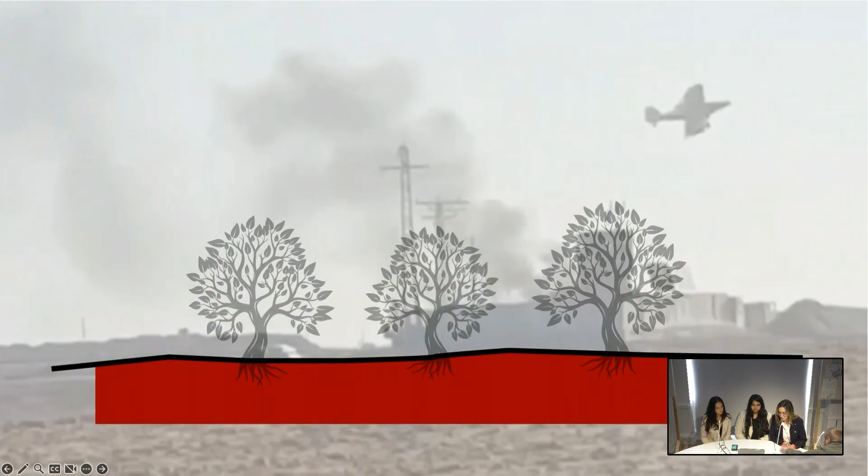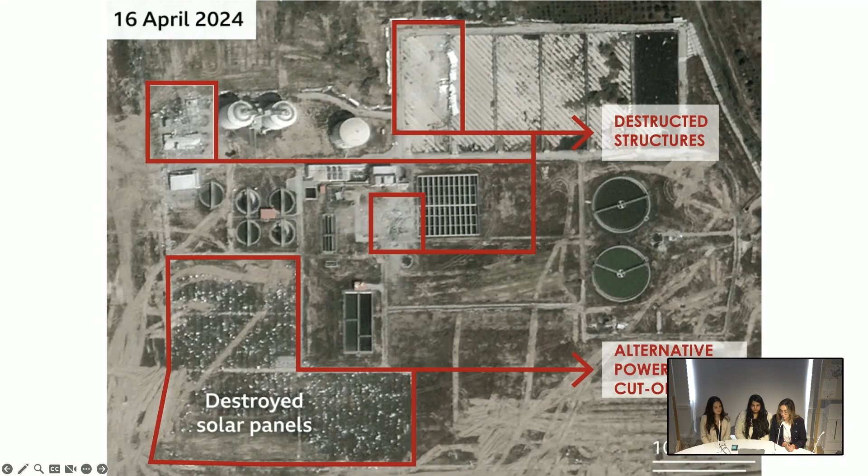Military operations continue to contaminate the ground as Human Rights Watch reports that white phosphorus has long-lasting effects, penetrating soil, destroying ecosystems and vegetation for years. Destruction of essential infrastructure has intensified the situation further. According to the UN Environment Programme, 60% of wastewater treatment facilities have been destroyed, and due to limited resources, materials, and restricted movements, around 70,000 tons of waste have piled up in makeshifts.

With an alarming rate, land devastation and wastewater systems collapse. We have an ecological emergency expected to persist for generations. How do we then imagine the future of Gaza?

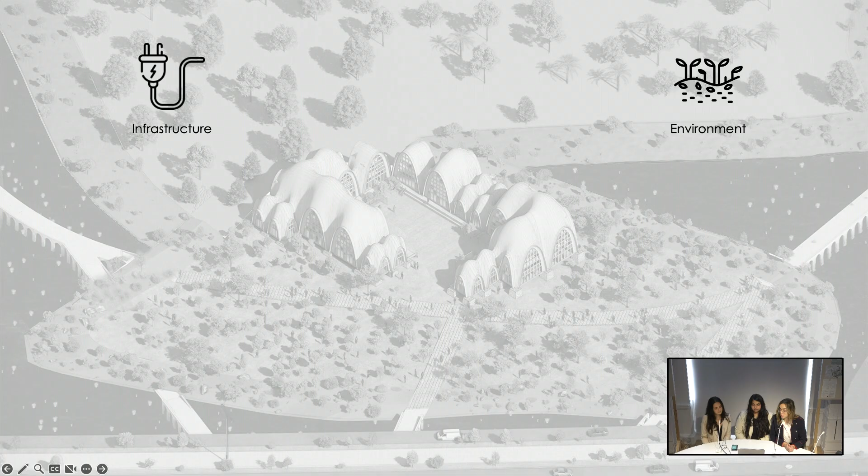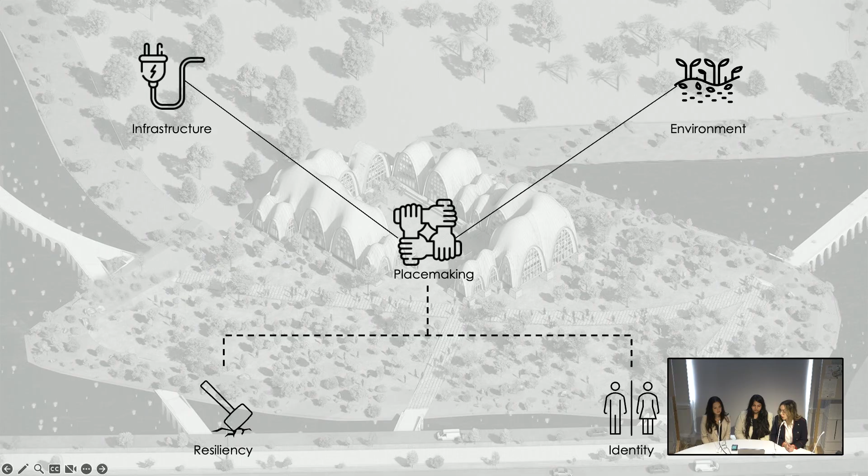Emerging from Gaza's ravaged landscape, this vision for reconstruction transcends physical rebuilding. It introduces a new building typology that heals the land and fosters placemaking, allowing people to reclaim their lives, culture, and hope. Architecture serves as a tool for resilience and identity, challenging colonial narratives while restoring ecological and social bonds. Through community strength, we reimagine Gaza as a place of renewal, where architecture leads to restoration of water, soil, and sky. Today, we explore the deep connection between architecture and ecology in shaping sustainable urban futures.

Architecture actively engages with challenges like climate change and resource depletion, emphasizing its responsibilities beyond technical solutions. We view the land as a vital element of architecture, underscoring the need to integrate building culture along with ground culture by dismantling barriers between built and natural environments. We make soil and water health cornerstones of our approach. In this way, architecture becomes a regenerative force, nurturing ecological resilience and fostering coexistence between human and natural systems.

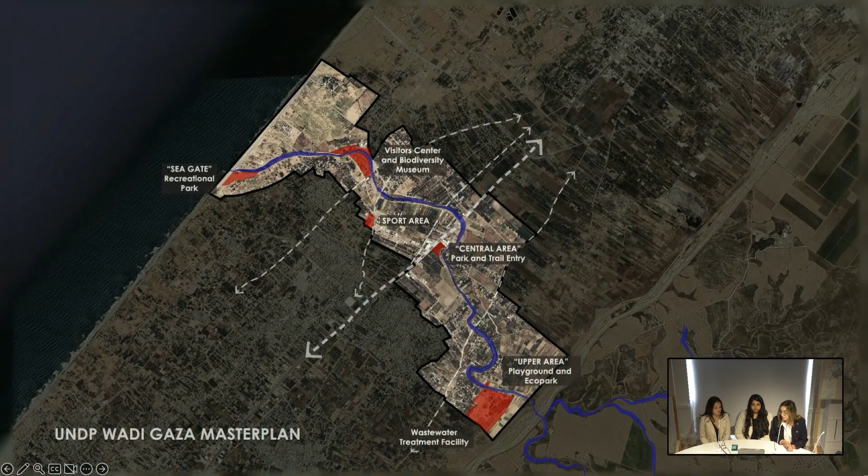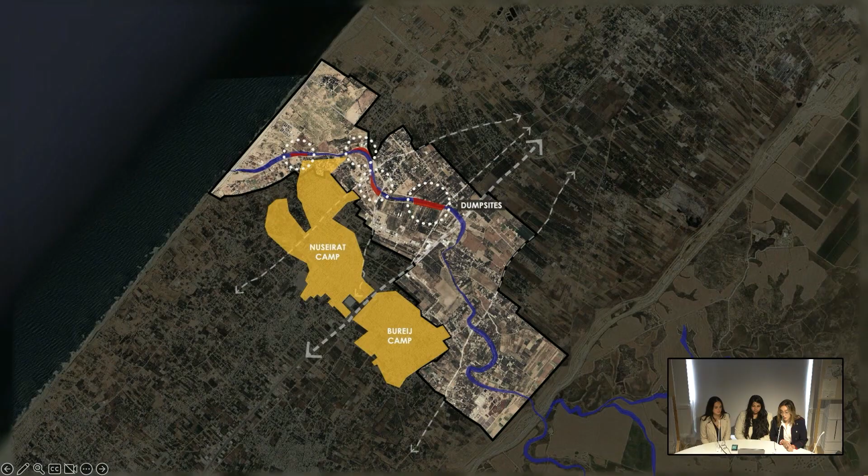Wadi Gaza is an essential seasonal river that recharges Gaza's coastal aquifer. However, it faces significant challenges that have degraded both water quality and soil health. In 2019, the UNDP proposed a master plan for its rehabilitation. Based on that, our proposal presents an alternative approach that links Gaza's infrastructure reconstruction with environmental rehabilitation, emphasizing ecosystem regeneration.

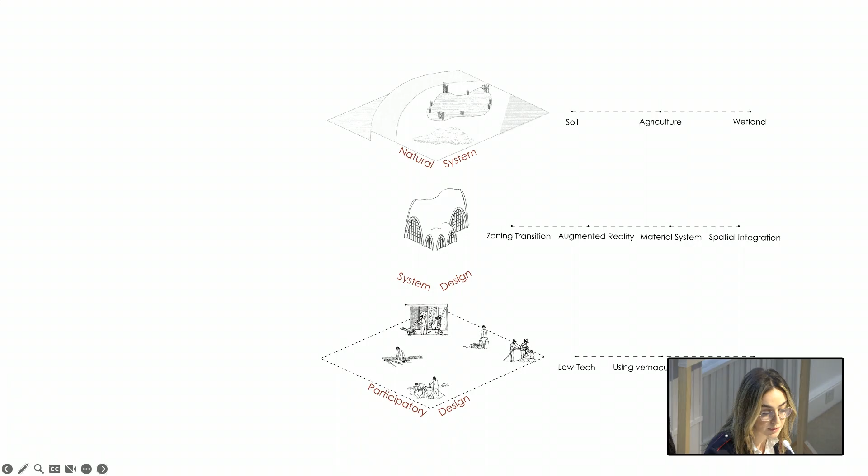Key questions we explore: how a low-tech material system reinforces intersections of public placemaking and remediation processes for wastewater and soil treatment, using local compressed soil block fabrication and enhancing awareness to foster a shared sense of ownership in the public infrastructural facility. We focus on 3 intervention levels: natural systems, system design, and participatory design, to propose a whole ecological system. The individual elements of the systems lie with each other in a feedback loop, affecting one another.

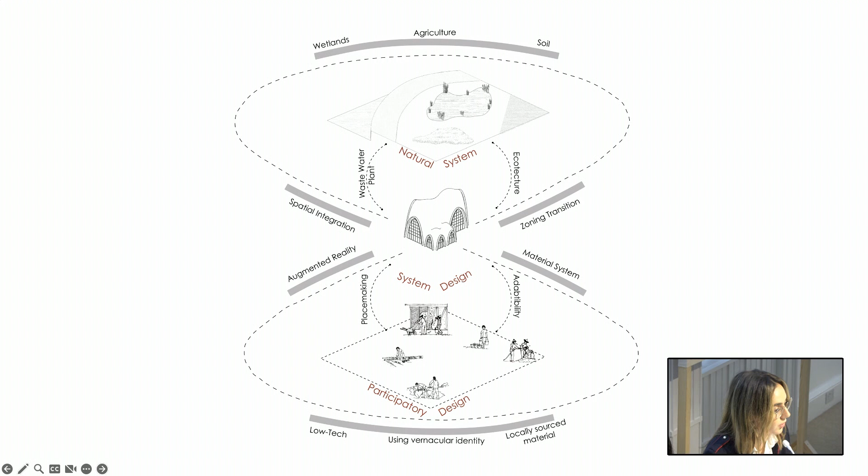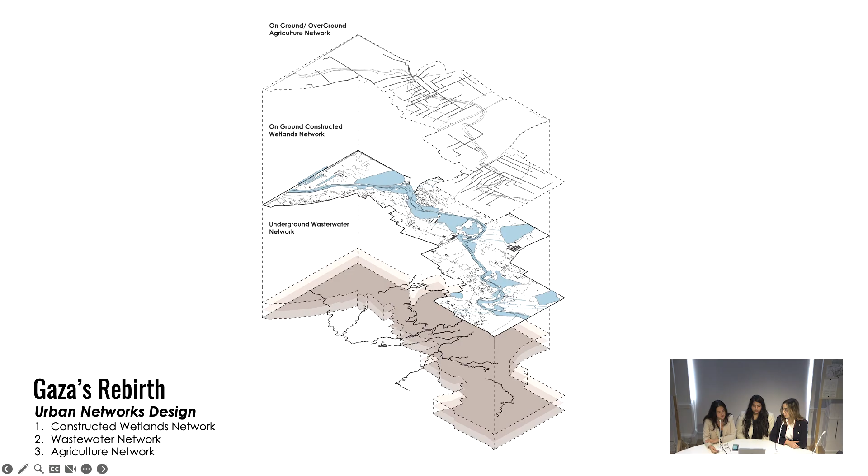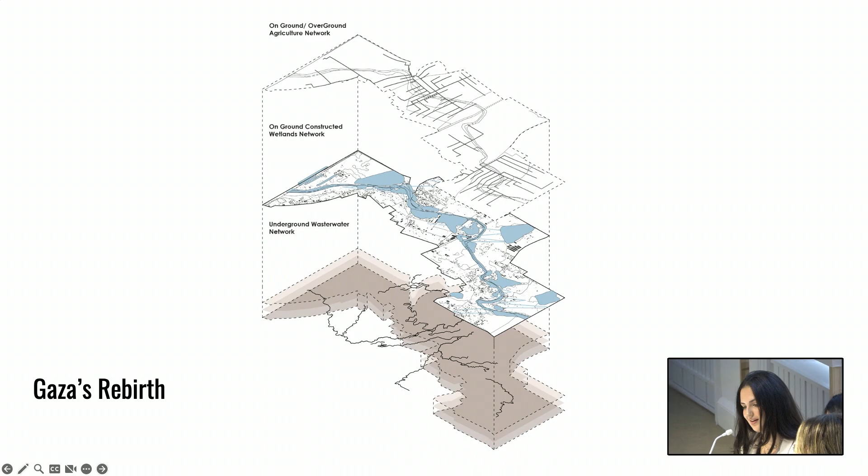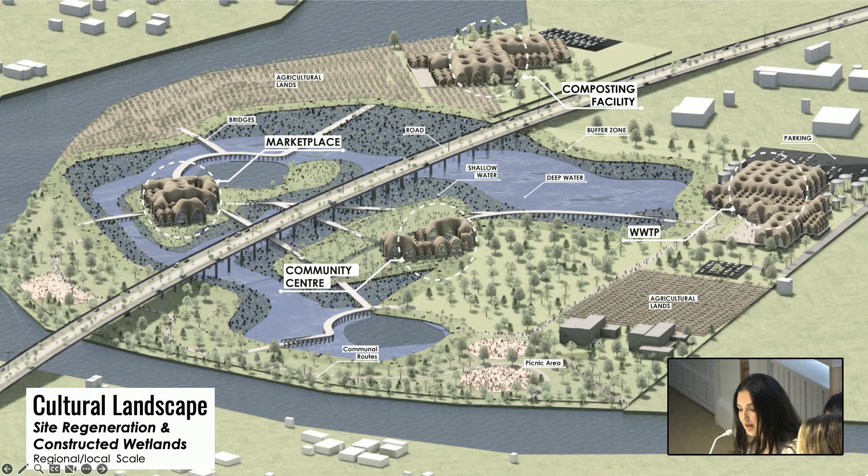The scope of the thesis encompasses the design of interconnected urban networks, emphasizing wastewater management, agriculture, and constructed wetlands, integrating systems that operate underground, at ground level, and above ground. At a regional scale, the thesis emphasizes site regeneration by integrating designed urban networks within a regenerative system that connects cultural landscapes and constructed wetlands.

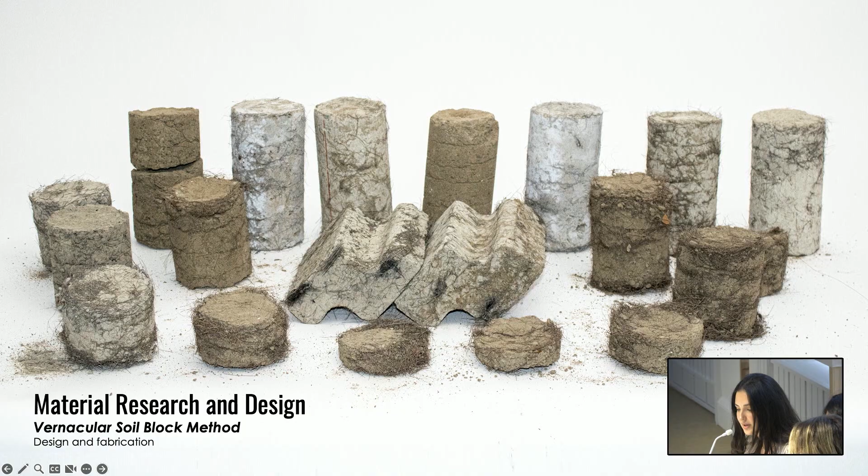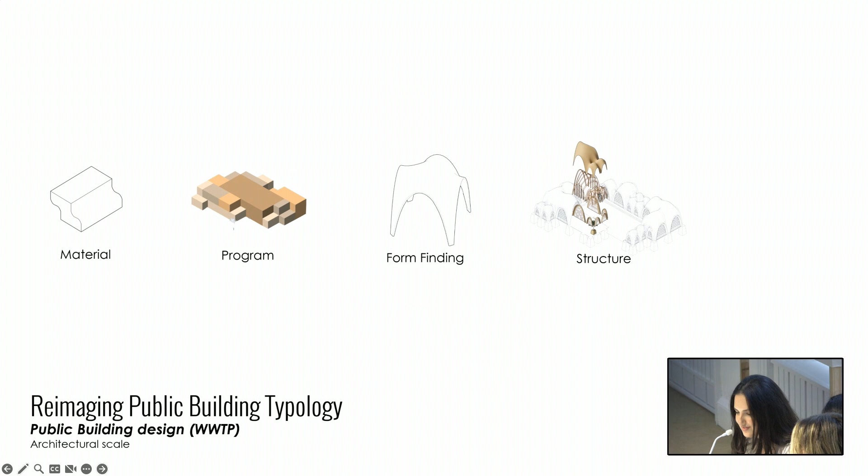Material research and design focused on utilizing local materials and employing compression techniques for the production of building bricks and fabrication techniques. Rethinking public building typologies to incorporate wastewater treatment plants, composting facilities, and communal spaces while addressing the cultural needs of the community. This approach fosters placemaking through educational, communal, and economic programs.

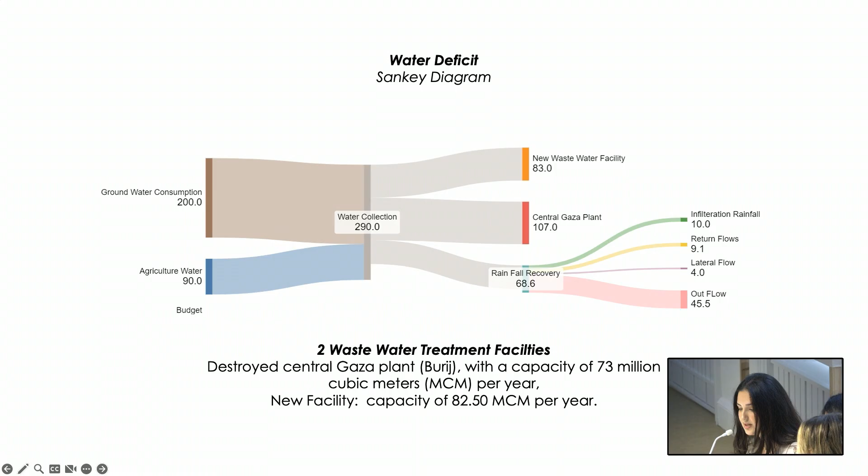Focusing on a natural system that integrates agriculture, water, and soil. The design of wastewater networks aligns with needs in wastewater production, irrigation, rainfall recovery, and groundwater usage. This assessment led to plans for 2 treatment plants, one as a replacement for the destroyed facility and another as a new addition. Wetland construction volume was calculated based on catchment area, runoff, and rainwater.

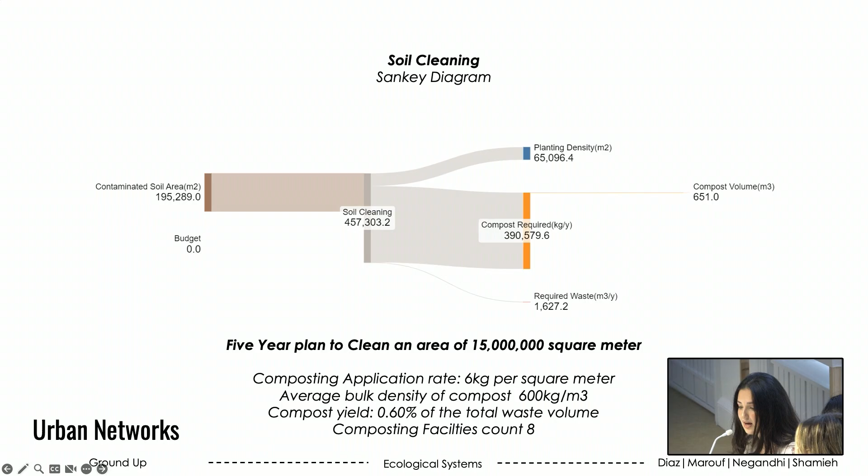Rehabilitation efforts around Wadi Gaza include composting processes with assessments covering the soil volume for remediation, raw waste capacity, planting density, and composting requirements in a 5-year land restoration plan. We begin by examining the broader global framework for urban network development in Wadi Gaza. First, allocating wetland bodies based on the natural terrain and water flow dynamics. Second, optimizing the underground wastewater collection system to support these wetlands. Lastly, we're working on enhancing the agricultural infrastructure to integrate with both the wetlands and the wastewater system.

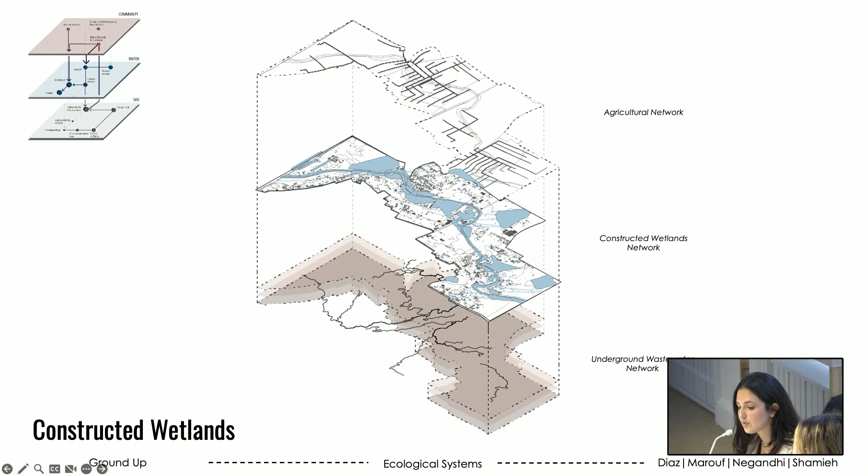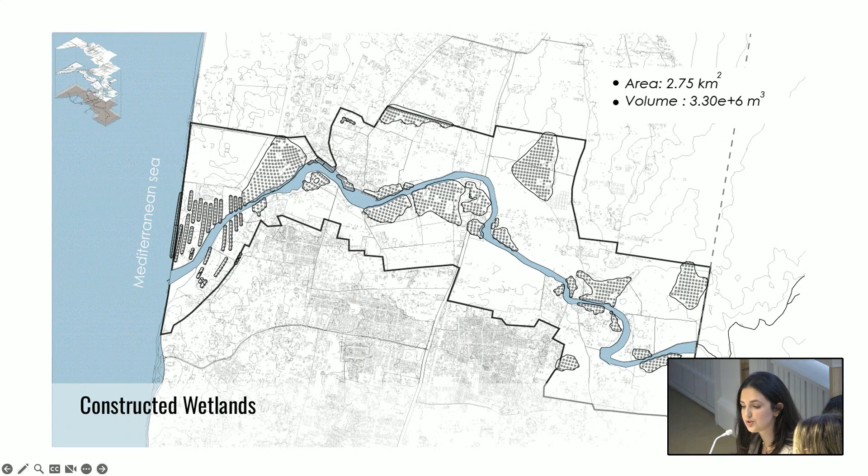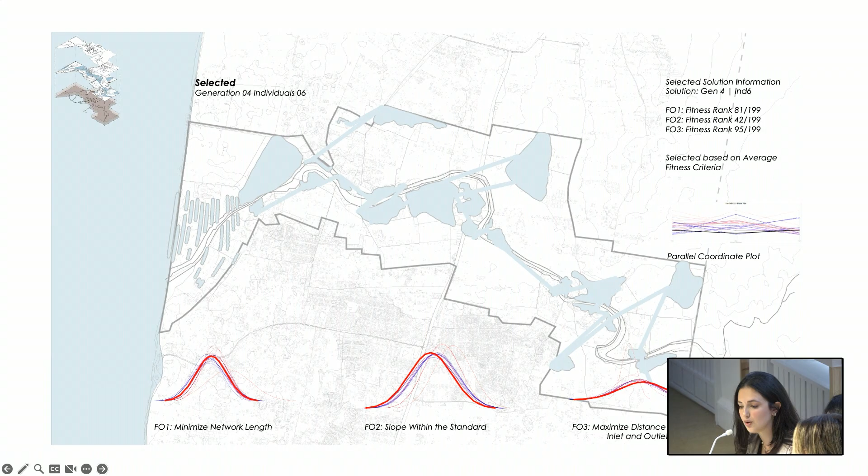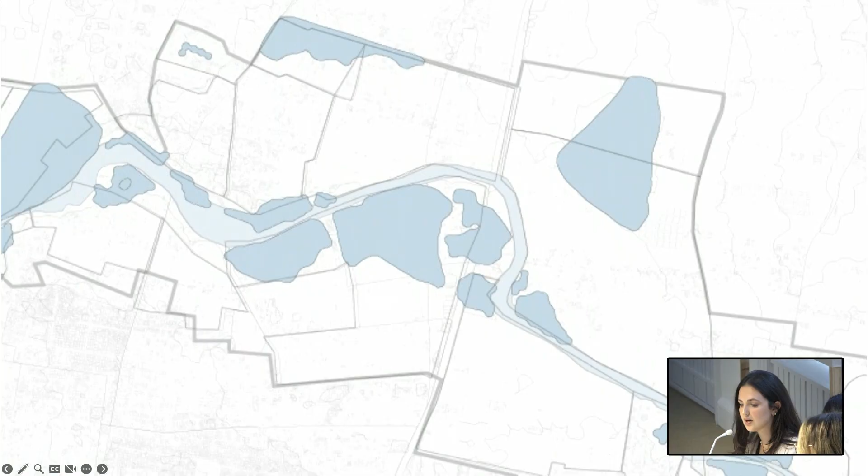Our wetland experiment aimed to determine optimal size and location based on water flow patterns, targeting stormwater capture, and directing treated wastewater to recharge the valley and the aquifer. We evaluated rainfall, elevation, slope, and runoff, placing wetlands in low-lying areas away from residential zones, with buffer zones to protect wildlife and public health. A meandering network was designed to slow water flow and enhance management. Using multi-objective optimization, we minimized network length, ensured appropriate slope, and maximized inlet-outlet distances to confirm water flow. Connecting the global network from the regional scale down to the local level of the selected site.

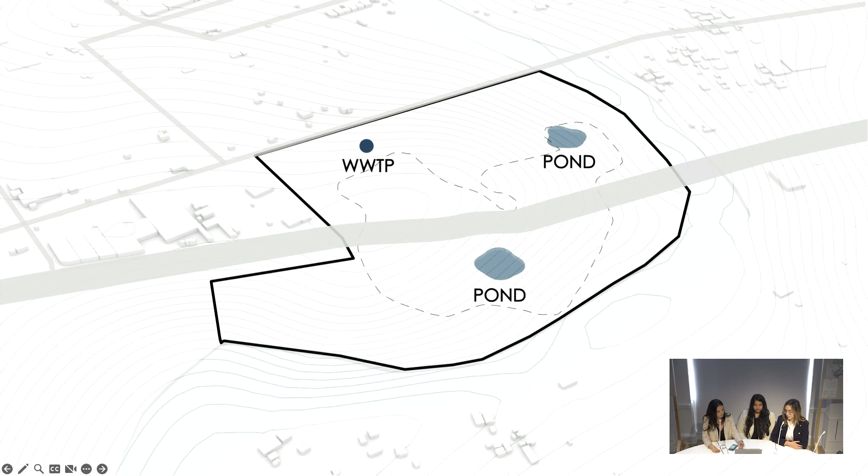The site is located along the wadi with the main road passing over. The network begins with the treatment plant and 2 ponds. An evolutionary algorithm was set up to minimize the material for the pipes, maximize pond volume, flow of water towards the ponds in accordance to the slope and the spiral of the nodes. Slope and elevation determine the points of the location of the treatment plant and ponds.

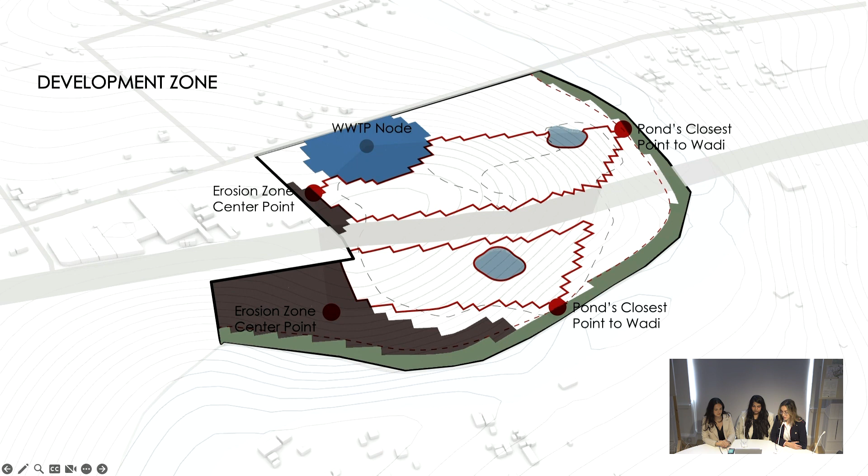Next, we provided the required area around the WWTP node, offset along the wadi for erosion protection, and set the composting zone according to prevailing winds. The plots for the public programs were generated central to different functions with target buildable area and relative distances to the main functions as objectives.

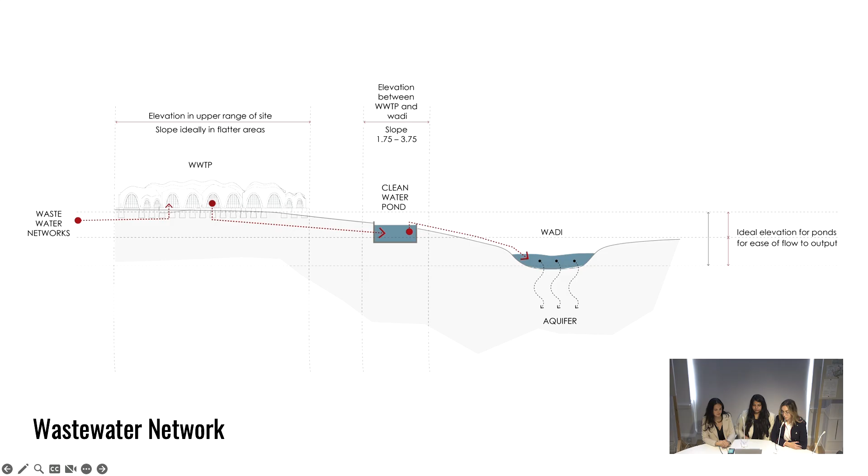Final configuration of the site regeneration was finalized with composting areas, wastewater areas. To facilitate effective site regeneration, the system connects treated wastewater to ponds, which replenishes the wadi and strengthens the wastewater network. The experiment aimed to optimize the flow of wastewater utilizing slope and elevation to ensure efficient water movement.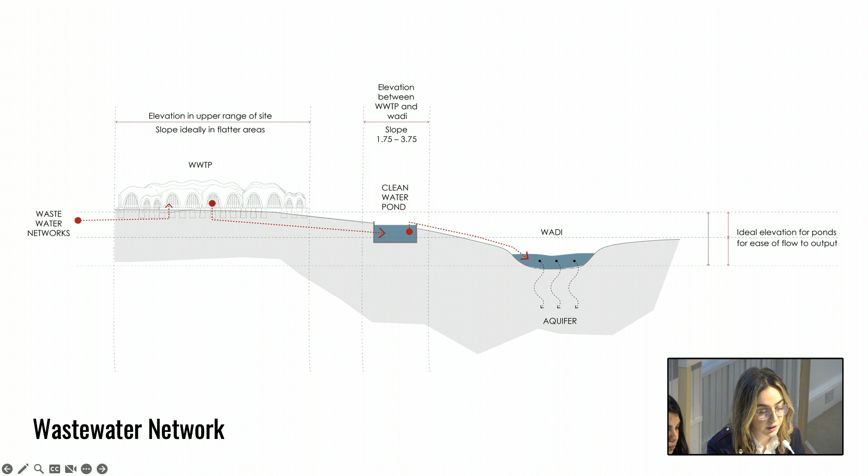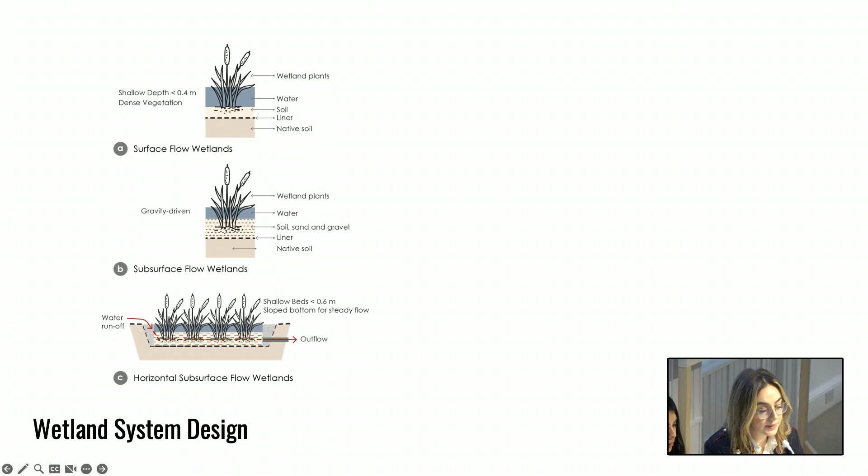The design of the wetland system involved determining the spatial configuration of the wetland surface while adhering to established standards for water flow, buffer zones, material types, and vegetation. The selected vegetation included aquatic macrophytes that play a crucial role in the water purification, comprising rooted plants, partially and fully submerged species, and floating varieties in deeper areas.

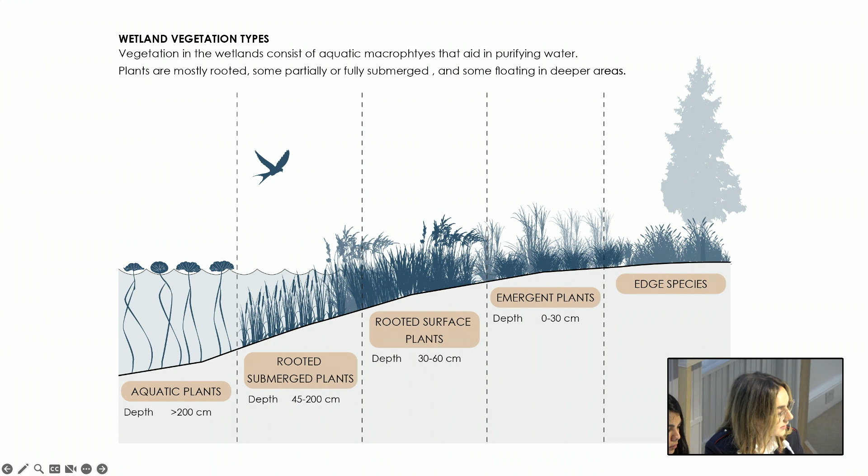Site zoning. On a local scale, the constructed wetland was designed to direct water towards the valley from a single outlet, maximizing purification through increased plant contact. Comprehensive water flow and slope analysis guide the selection of the points for the sedimentation pool, which was designed with a slope between 0 and 1.25 to promote sediment retention.

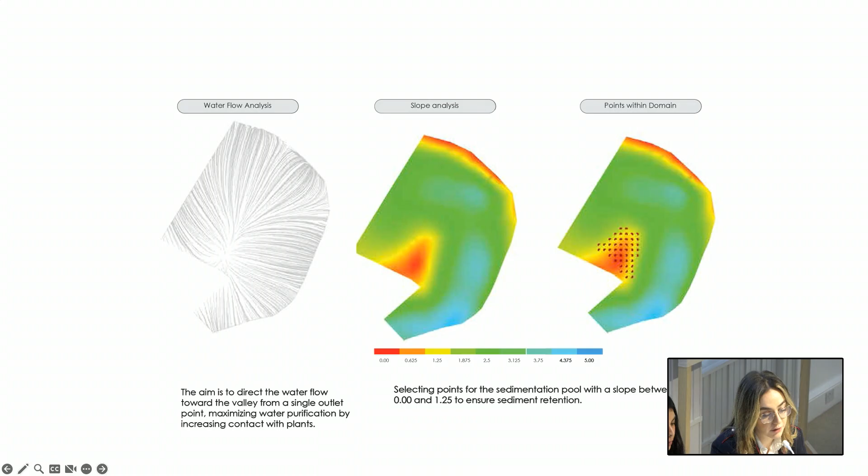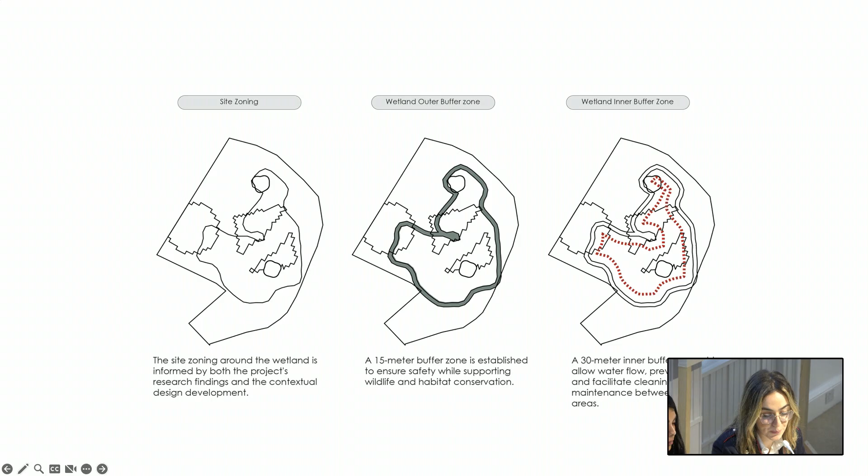Site zoning around the wetland was informed by project findings and contextual design consideration. A 15-meter buffer zone was established to ensure safety while supporting wildlife and habitat conservation, alongside a 30-meter inner buffer to facilitate water flow and prevent blockage, allowing for effective maintenance between buildable areas. Finally, refinements were made to the development areas and buffer zones, including the design of a sedimentation pool that retains 5% of its treated water and clean pools.

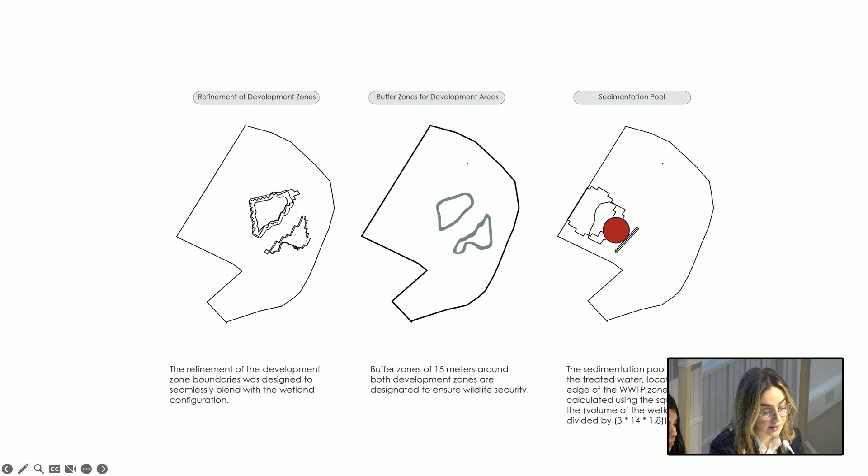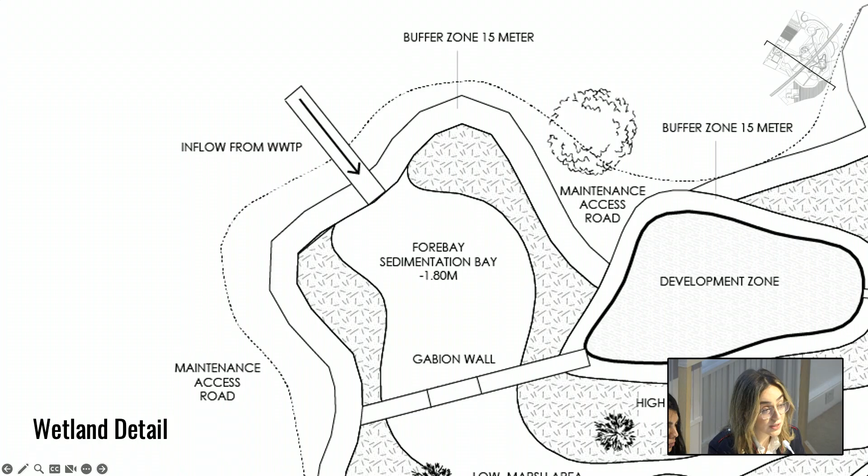Zooming in, the detailed constructed wetland design. The forebay serves as inlet for the water from both the wastewater treatment plant and stormwater. The water flows through the low and high marsh areas gradually, moving towards the clean water deep pool. Both the clean pools with the constructed wetland receive the filtered water from the wastewater treatment plant, enhancing overall quality and dispersing the water towards the valley through an outlet point.

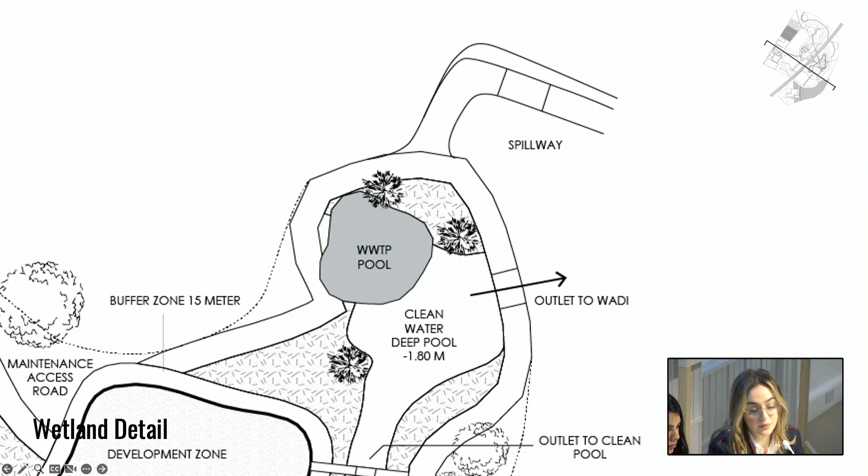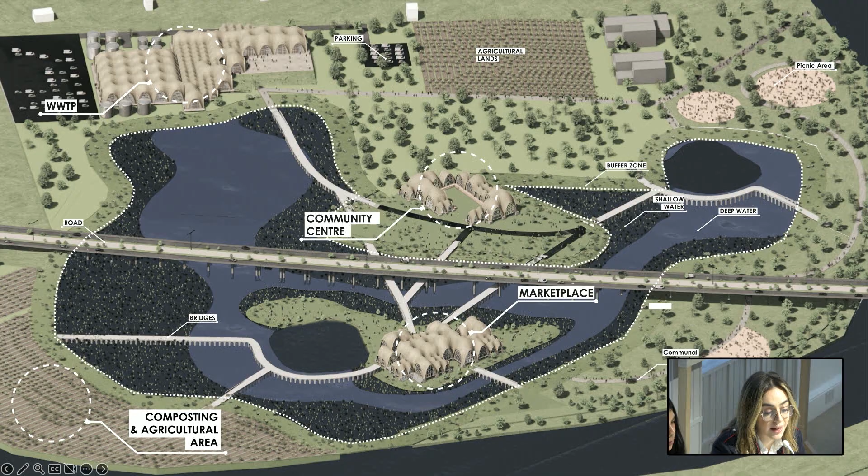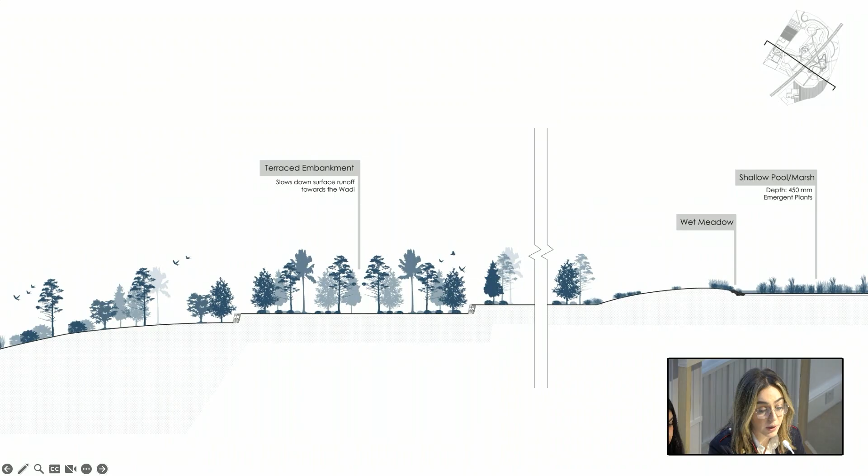The wetland covers a large portion of the site, offering stormwater treatment, habitats for wildlife, and enhanced spaces for community enjoyment. This close connection fosters educational opportunities, a sense of shared ownership, and a deeper bond with the land. Taking a sectional approach to Gaza, we focus on building from ground up through an integrated regenerative design. By dispersing infrastructural spaces around public programs, we create a fluid transition across the site, blurring boundaries between built and natural environment for a seamless, immersive community experience.

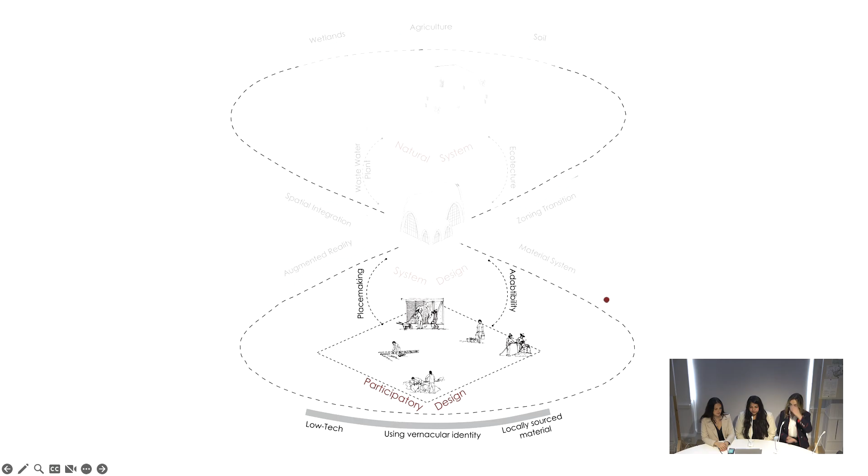Looking at participatory design, addressing material limitations while leveraging local resources, we studied existing building techniques and architectural goals, aiming to develop water-resilient, thermally insulating, scalable, and easy-to-fabricate materials that encourage community participation. The material development aims to create a foundational building solution inspired by Gaza's traditional loam architecture.

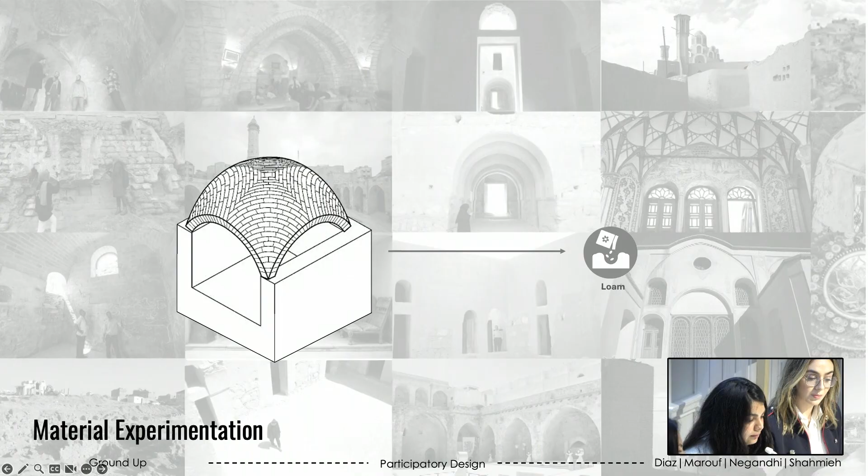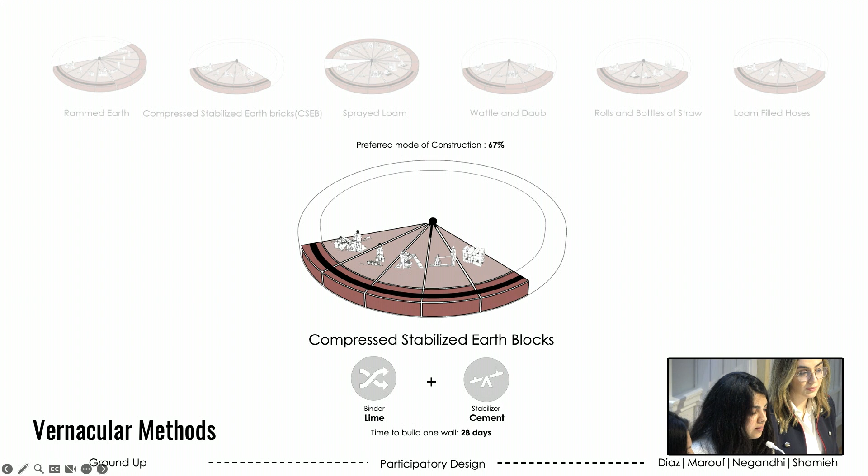An assessment of vernacular construction methods showed that enhancing loam's effectiveness required both an additive and a stabilizer. However, natural additives often have competing industrial uses, and unnatural stabilizers raise environmental concerns. CSEB is a very well-known technique used by 67% of the population, with easy assembly, which uses lime and cement as additives. The project uses the abundant but underutilized date palm fibers from Gaza's agricultural palm trees to improve loam's adhesion and strength. Magnesium oxide, a natural stabilizer from desalination brine, hardens the mixture by absorbing CO2, making it a carbon-negative solution.

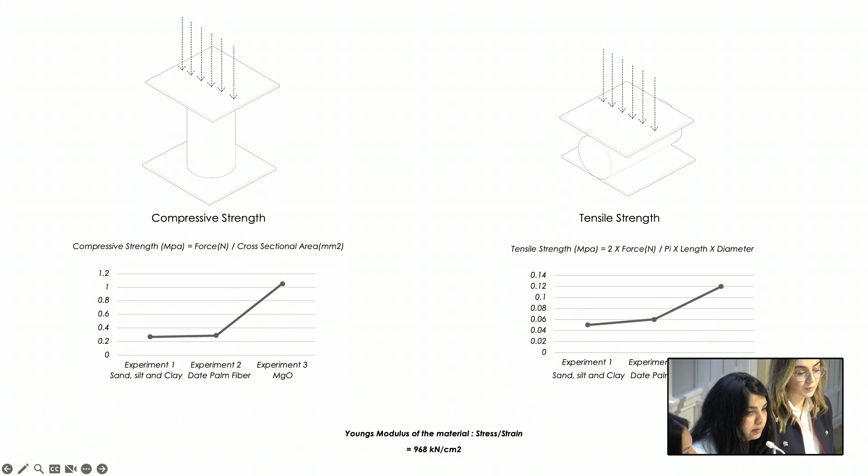3 experiments were conducted to find the optimal ratio and strength of the material, each identifying the best combination of the binding materials, which were further used for the next trials. Compressive, tensile strength, and water resiliency assessments reveal that the material could achieve a maximum compressive strength of 1.05 MPa. And in order for a sustainable cycle, crushed blocks can be easily reintegrated into the soil, ensuring that the land and its resources continue to support the community.

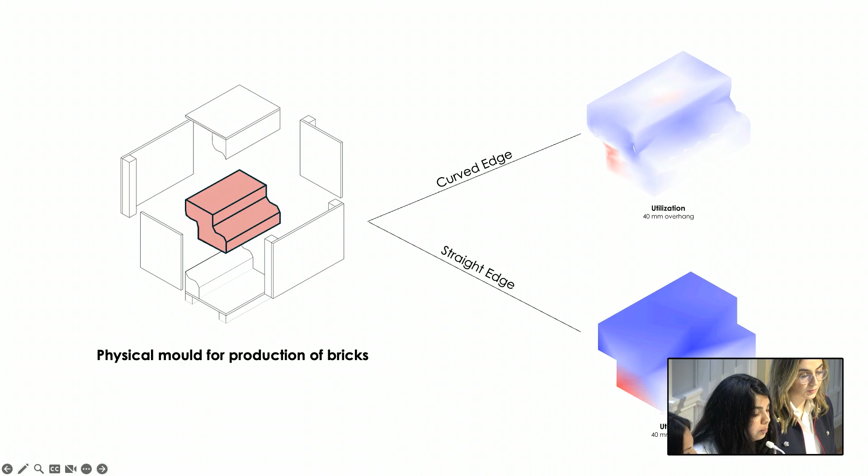The research links material experimentation to morphological fabrication, focusing on brick design that supports the compression studies inspired by the vernacular techniques grounded in principles of friction and bonding. A simple physical mold was developed to streamline the brick production process, enabling the community to manufacture them with ease.

We focused on integrating public infrastructure with community spaces to foster communal interaction and placemaking. A weekly schedule for activities in our facility was established, prioritizing educational workshops, cultural classes, and recreational events that encourage community engagement. The infrastructure supports community-oriented programs, including indoor play areas, creating a cohesive environment that promotes environmental restoration and raises community awareness. Utilizing research and programmatic needs, we developed a space quality assessment matrix to effectively organize and connect these programs.

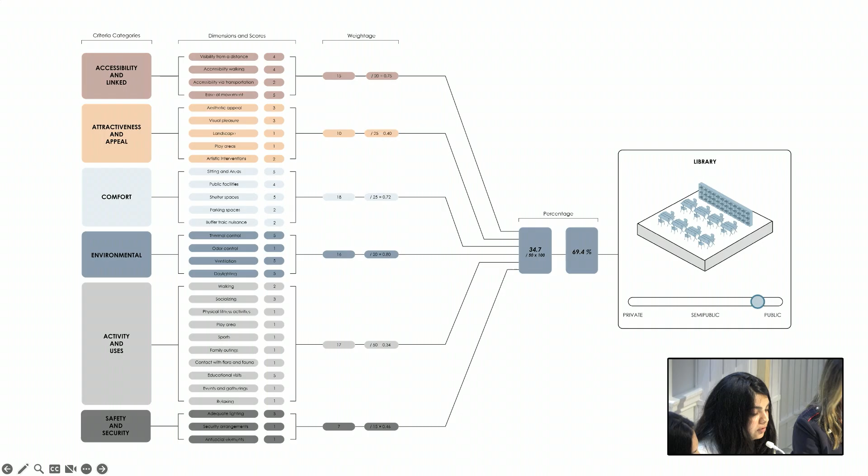Utilizing existing research and programmatic needs, we developed a space quality assessment matrix to effectively organize and connect these programs. The spatial allocation and integration of programs were determined using computational algorithms for form finding and structural stability.

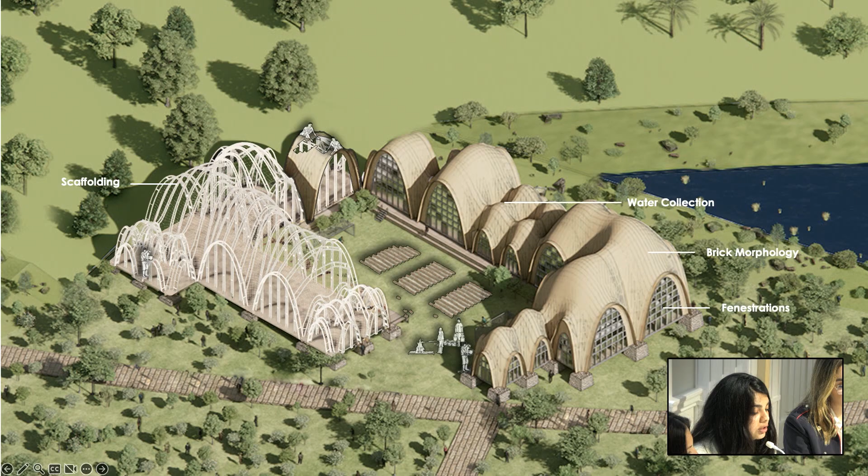This approach incorporated solar radiation analysis for fenestration design, optimizing light requirements, thermal comfort, and water flow assessments. The building typology was further refined to include detailed fabrication, construction, and architectural elements, facilitating ease of community participation.

A key aspect of the program's future development is ensuring easy access for the community, allowing for a seamless integration of each phase. This approach not only enhances community learning, but also fosters participation in the building process.

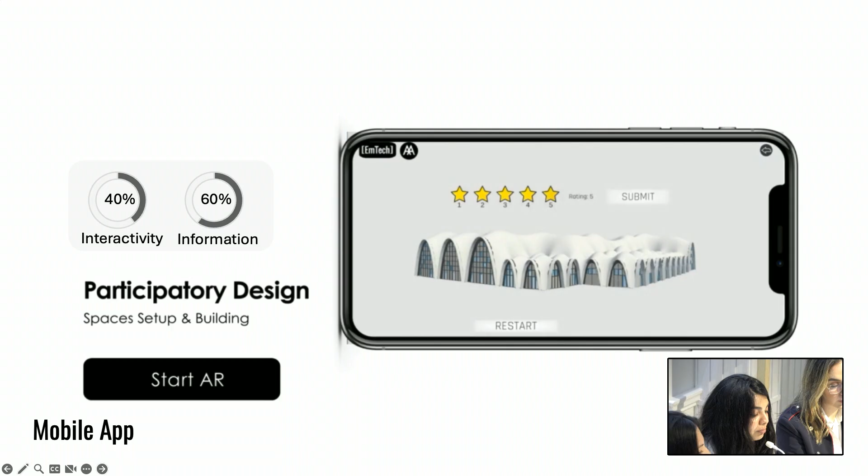The app that we developed introduces users to the project's vision, the designers, and the innovative materials being utilized, all with a user-friendly interface. Once configured, they can visualize the building in a real-world AR scene. A simple tap provides a step-by-step guide to the building process, transforming it into a hands-on, enjoyable experience.

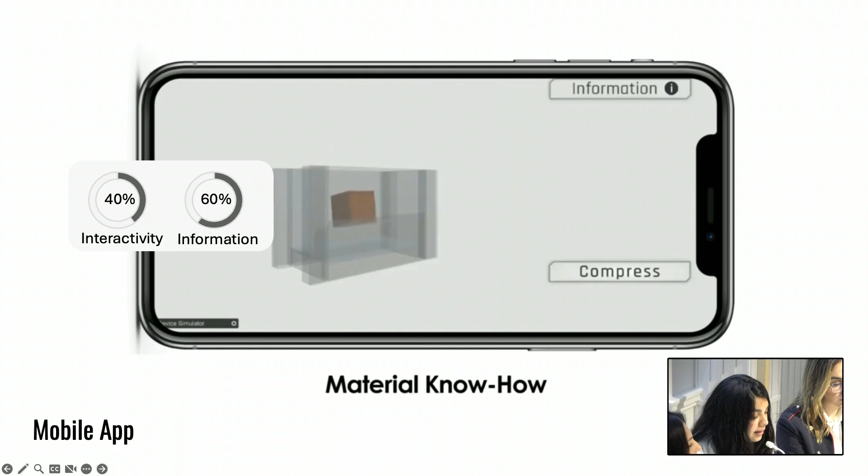We are continuously enhancing interactive features to redefine how communities and projects connect, fostering a collaborative and educational environment for all. This proposal addresses the ecological, social, and environmental crisis, as well as establishes a framework that empowers the community

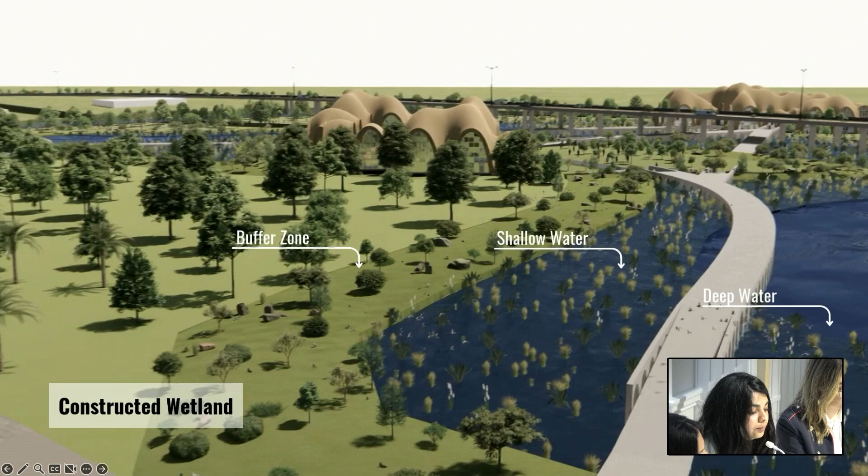to rebuild, focusing on improving human living conditions and restoring the vital elements of water, land, and sky, thereby giving voice to the people and narrating their stories through a resilient landscape of a city that has endured profound destruction. Thank you.

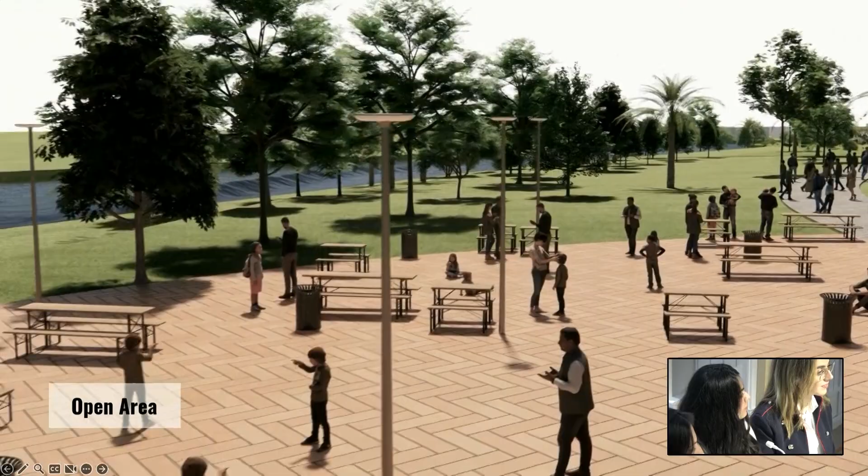Do we have any questions? Thanks. Thanks, guys. I had one question. I don't know how it works in the Gaza Strip, but in the UK, a project like this crosses boundaries of the environmental agency, the water treatment plants, the ground associations. There's highways that are going through this.

There's educational programs in this. There's public spaces you were creating through this. So there's a lot of different organizations that would have to be involved in this. And I was wondering how the structure is there and how you thought about these different groups engaging in this project.

So basically, we've been in contact with Architects for Gaza, and they've been working with short-term projects considering hospitals, schools, and houses. So our proposal is linked to a short-term solution with them. The second phase is constructing the fast processes of remediation with the locals.

Third is with the UNDP, since they already worked on the rehabilitation proposal, considering open spaces, considering the rehabilitation of the Wadi itself, so their scope is a bit similar to us. So I think the UNDP is the best organization to go with this project if we're going further with it. Thanks.

Thank you so much for presenting and also bringing forward some important issues that need to be discussed. So I was wondering, in your presentation, which was quite thorough in a way that it jumped between scales, you talked about the ecosystem, but you also specified the specific type of vegetation. And my question is, do you see this project expanding onto a larger scale?

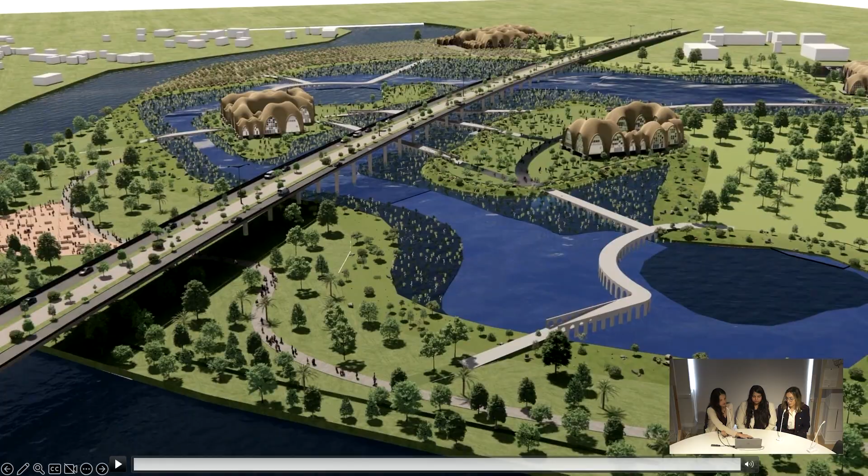Yeah, so we know that this is a way forward morphology, and obviously what's happening now in Gaza won't allow this to happen right now. We understand that it will take 30 years to come up with the whole system. That's why we can show it again. We have a process that the community can follow. We're using wooden scaffolding, and then the very basic brick that can be made by the community. And then step by step, they can form these volumes.

We are currently working on a simpler version of what we propose in MSc to tackle the first phases, which are, let's say, in 2 years. We will be using basic local materials so that you have the scaffolding here in 30 years, but it has to be done step by step. The first phase would be to use local materials to build basic structures, which could be basic boxes, and then those boxes or volumes can be put on top of each other, forming the scaffolding, which you can see in the picture here, and then finally building the bricks on it. I don't know if I answered your question.

I would like to add a few more things. Recently, the architectural practice in Gaza is mainly focused on concrete bricks, concrete and steel, and there's a limitation of material importation. So we're trying to give an alternative method of building, which they can further develop in the future. For now, we worked on a long-term structure, which is the catenary arches. But later on the timeline of rebuilding, there should be a temporary structure first to promote rehabilitation and the processes of remediation. And then further on, this gets built into the catenary arch.